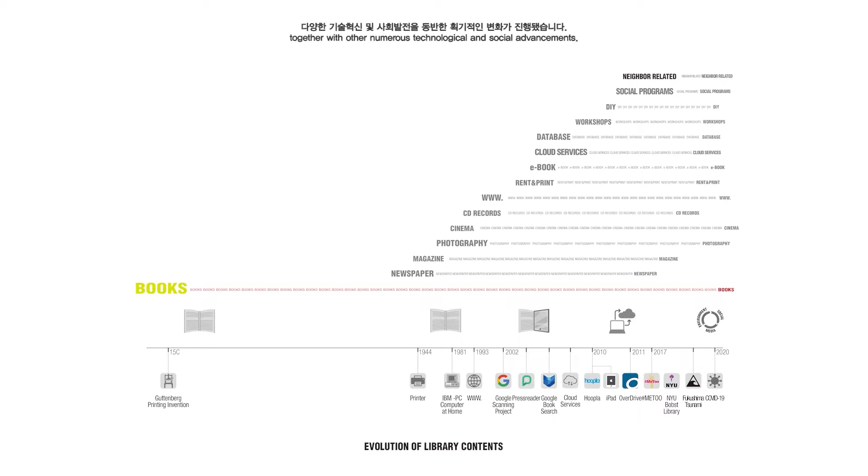For centuries, libraries have been traditionally the spaces where books are stored and read. However, since the early 2000s, a transformative change has been underway with the digitalization of cultural content, together with other numerous technological and social advancements. This has exponentially broadened the spectrum of content available within the walls of the library.

Also, the patronage of libraries has expanded both in numbers and diversity. While in the past libraries were primarily visited by scholars and elite, today they attract a multifaceted cross-section of society. People now turn to libraries not only for internet access or reading a book, but also to seek assistance in navigating an increasingly complex world.

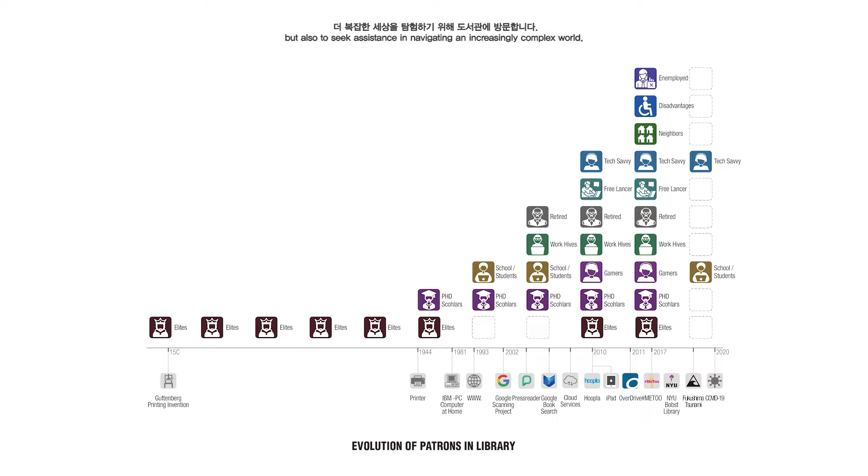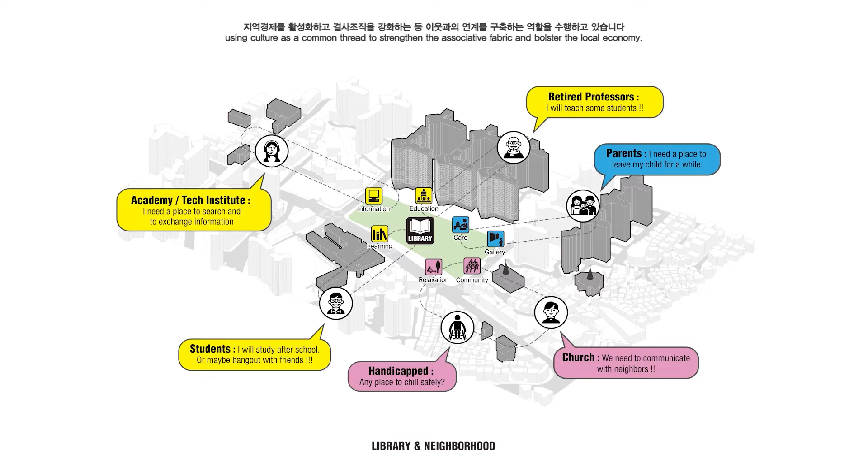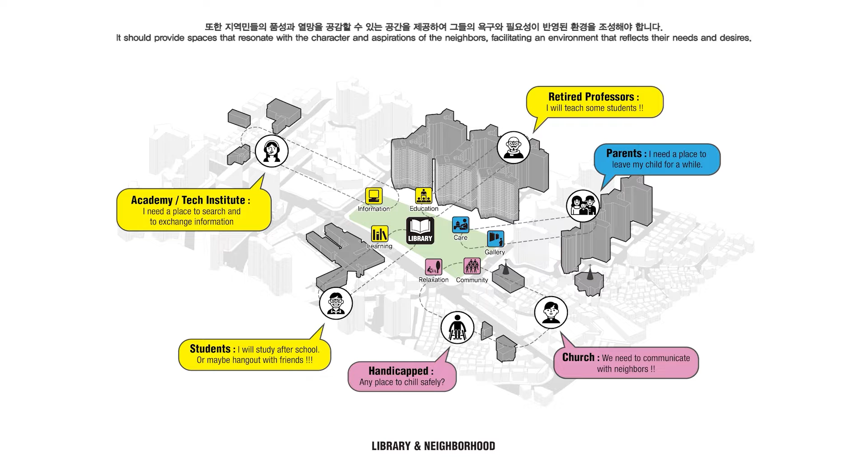The contemporary library is tasked with creating connections with the nearby neighborhood, using culture as a common thread to strengthen the associative fabric and bolster the local economy. It should provide spaces that resonate with the character and aspiration of the neighbors, facilitating an environment that reflects their needs and desires. To a certain extent, we can say that libraries have become the true centers of community.

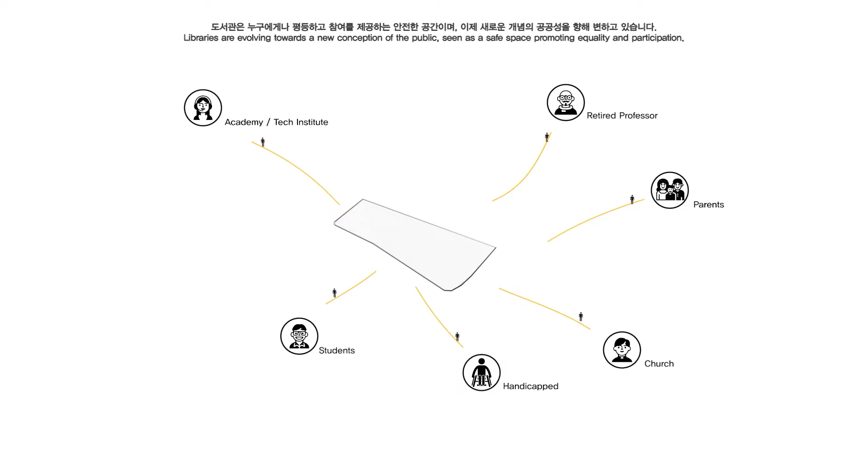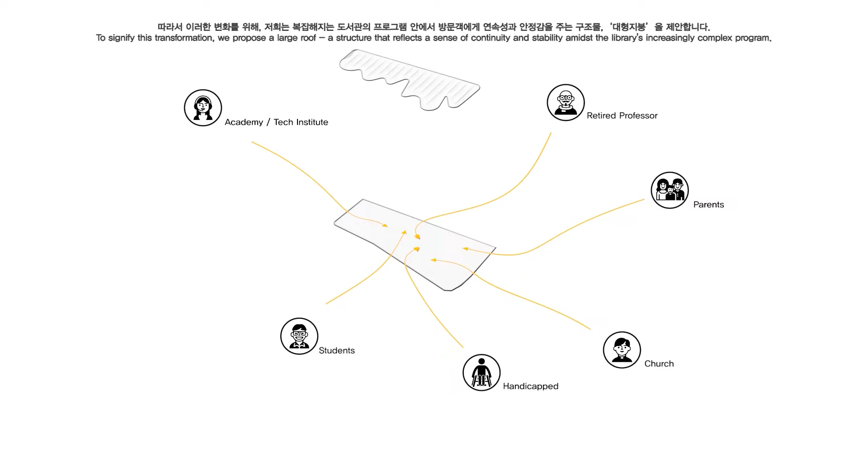Libraries are evolving towards a new conception of the public, seen as a safe space promoting equality and participation. Today, libraries are more of a public space than a building. And to signify this transformation, we propose a large roof, a structure that reflects a sense of continuity and stability amidst the library's increasingly complex program.

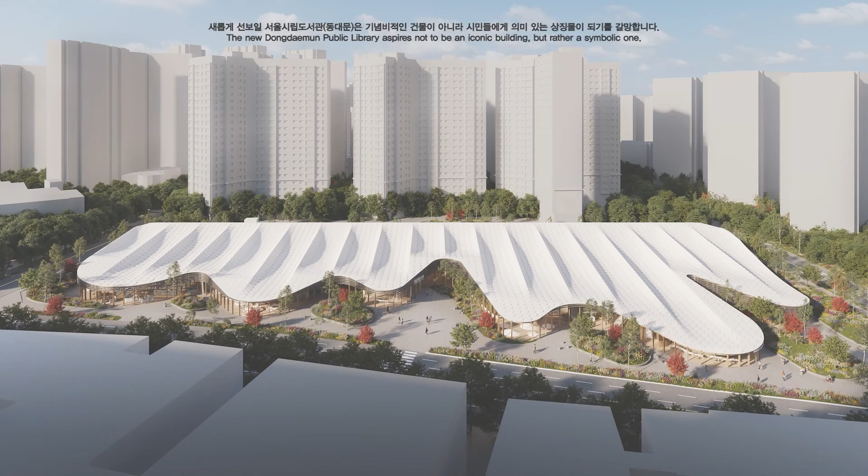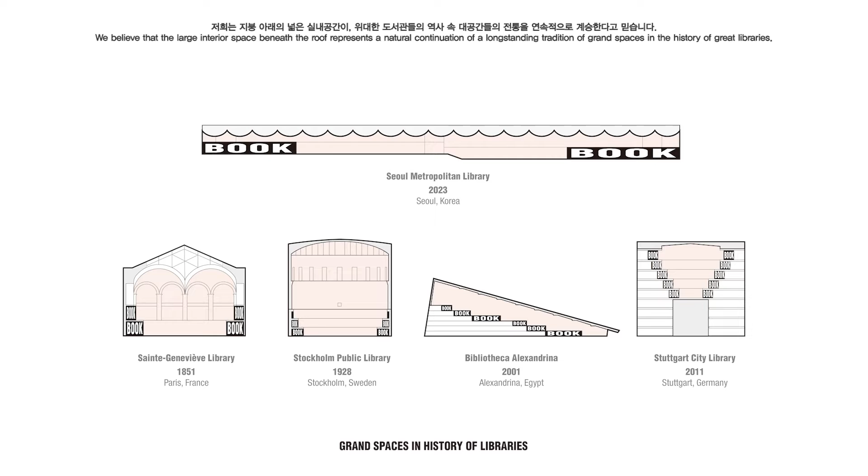The New Dongdaemun Public Library aspires not to be an iconic building, but rather a symbolic one. It seeks to move away from the notion of fortress and monumentality, instead embracing the idea of an open institution accessible to all. We believe that the large interior space beneath the roof represents a natural continuation of the long-standing tradition of grand spaces in the history of great libraries.

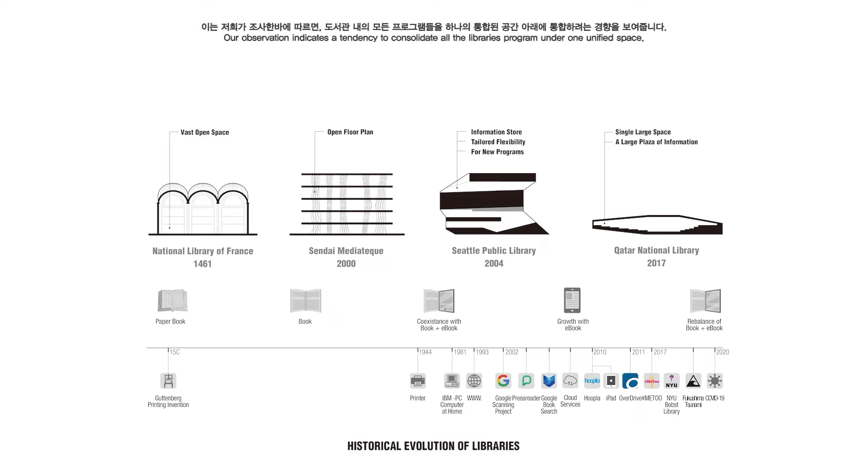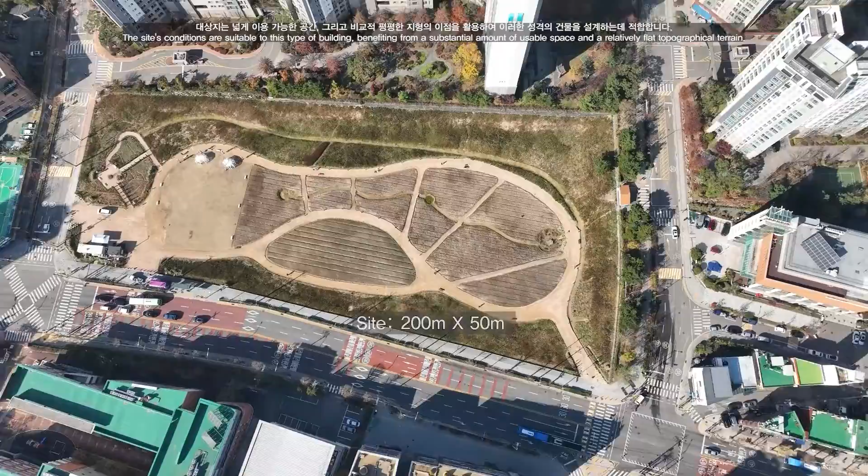Furthermore, we assert that the typology of a single roof aligns with other visionary libraries built in recent times. Our observation indicates a tendency to consolidate all the library's program under one unified space. The site's conditions are suitable to this type of building, benefiting from a substantial amount of usable space and a relatively flat topographical terrain. The initial step involves accommodating the building to the existing topography.

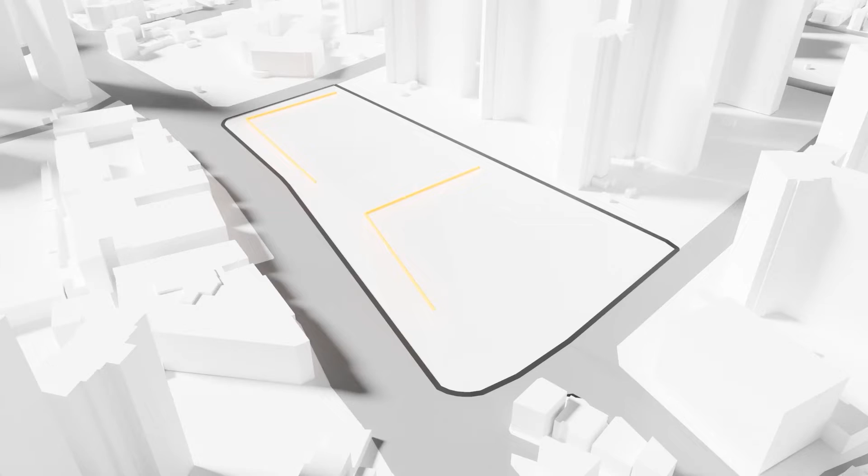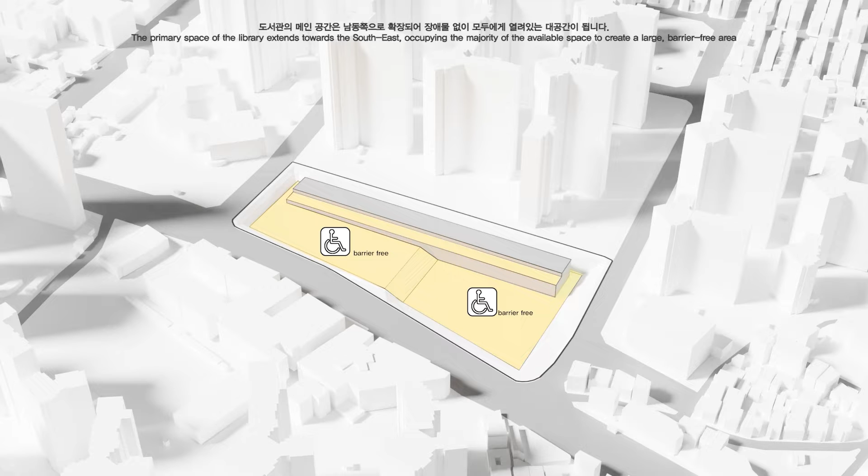Once the levels are determined, a longitudinal building is located on the northwest side of the plot. A service road behind the building provides access to storages, drop-off vehicle lines, and parking lots. The primary space of the library extends towards the southeast, occupying the majority of the available space to create a large barrier-free area. The front facade undulates, blurring the distinction between the interior and the exterior, including the natural area surrounding the building. A continuous glass facade facilitates a direct connection between nature and interior spaces.

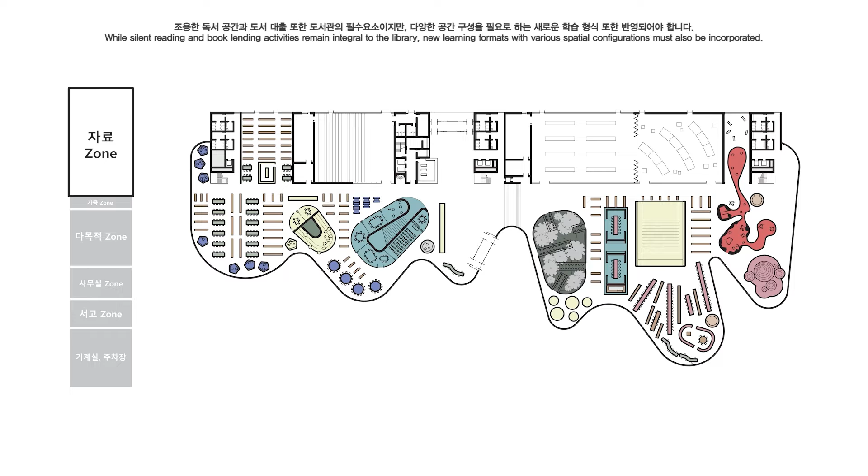The multipurpose room, archive, and exhibition spaces are located in the longitudinal piece. In contrast with the rigidity of this piece, the library, or data zone, occupies a flexible and dynamic space. As mentioned earlier, the library of the future must provide innovative ways of accessing information. While silent reading and book lending activities remain integral to the library, new learning formats with various spatial configurations must also be incorporated. What is important is to organize all those spatial variations so that they don't interfere with each other.

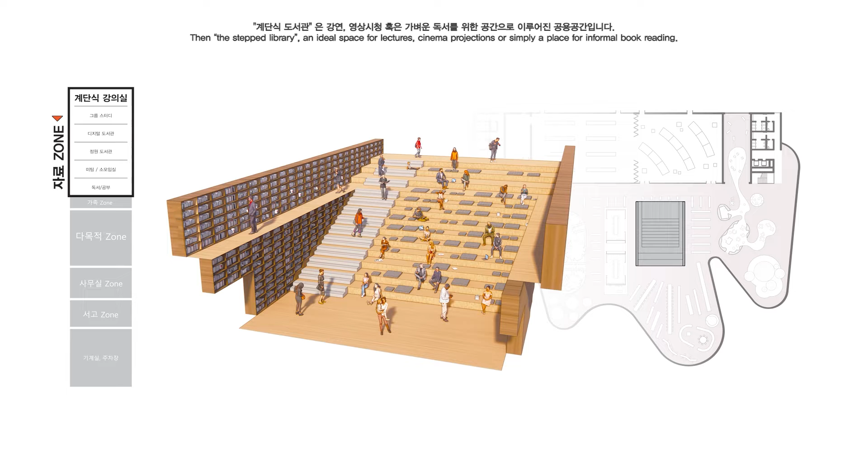From left to right, we start with the family zone, an area for the youngest, divided in various zones according to children's age. Then the stepped library, an ideal space for lectures, cinema projections, or simply a place for informal book reading. The active group studying area is organized with long tables and bookshelves in a dynamic configuration. Then the digital library, where users can find PCs, digital checkpoint, laptop rental stations, and a cafe.

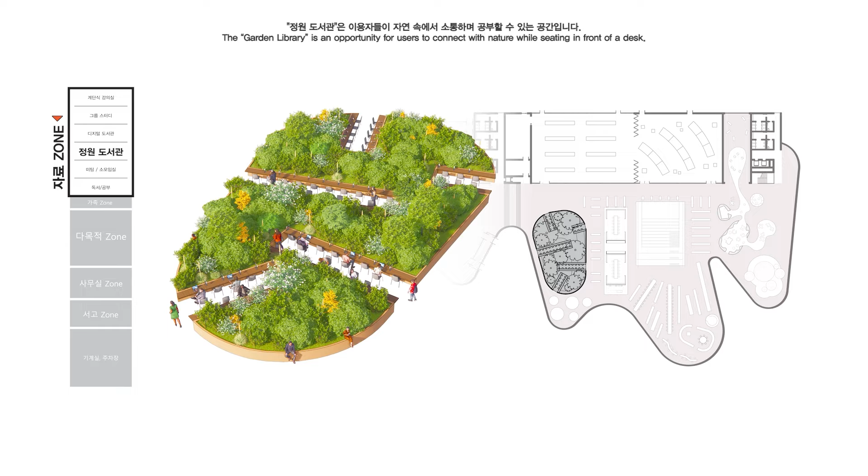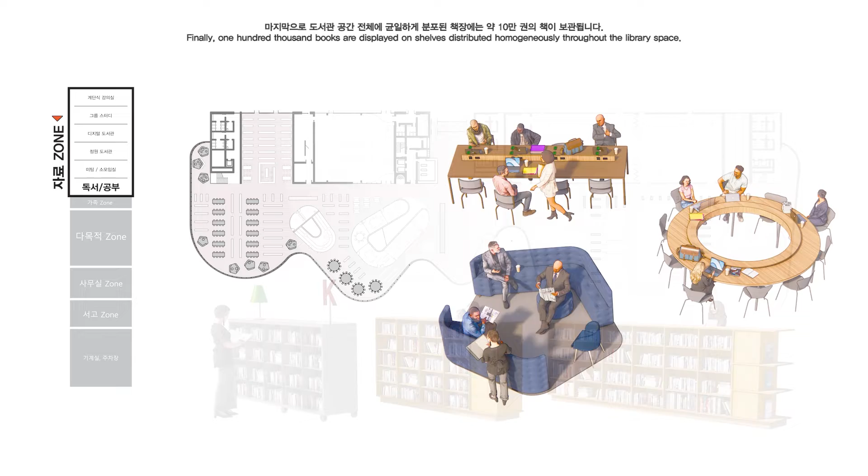The garden library is an opportunity for users to connect with nature while sitting in front of a desk. The library also provides carrels that can be used for focused study or small, medium-sized meetings. On the left side of the library space is located the silent area, a place for concentration and silent study. Finally, 100,000 books are displayed on shelves distributed homogeneously throughout the library space. Bookshelves are equipped with wheels, allowing for an easy rearrangement within the space.

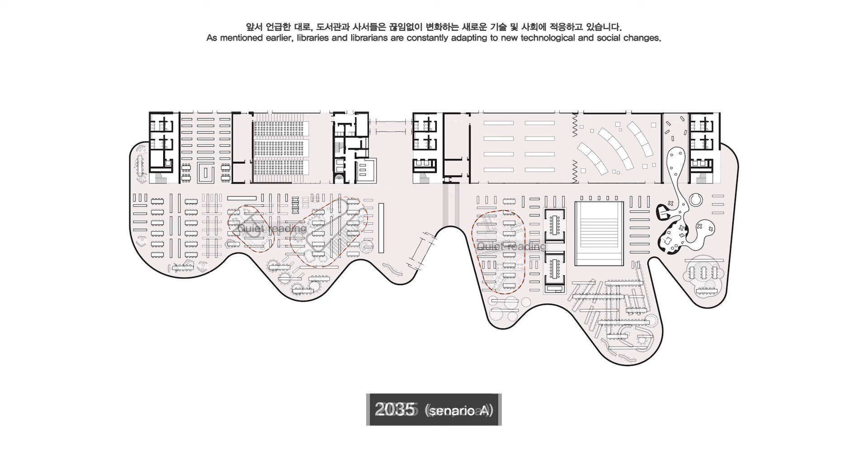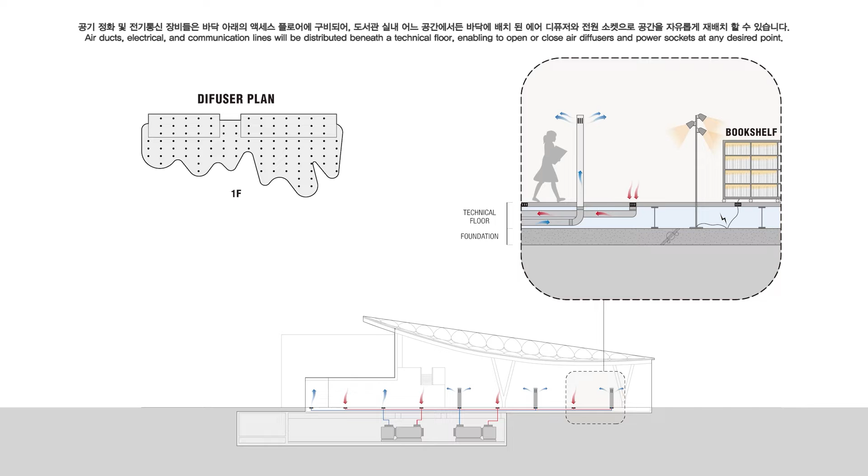As mentioned earlier, libraries and librarians are constantly adapting to new technological and social changes. Consequently, the buildings we design for libraries must facilitate continuous adaptation, providing librarians the freedom to redesign the space according to future needs. The design of the mechanical and electrical systems facilitates an easy reconfiguration of activities. Air ducts, electrical and communication lines will be distributed beneath a technical floor, enabling to open or close air diffusers and power sockets at any desired point.

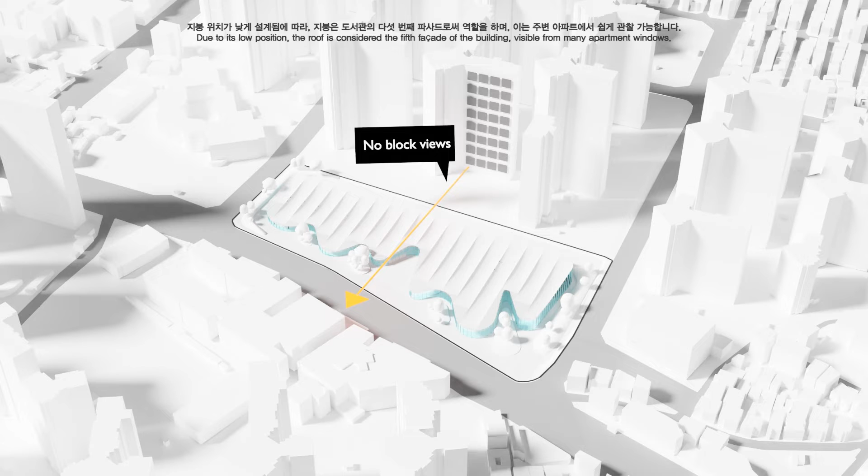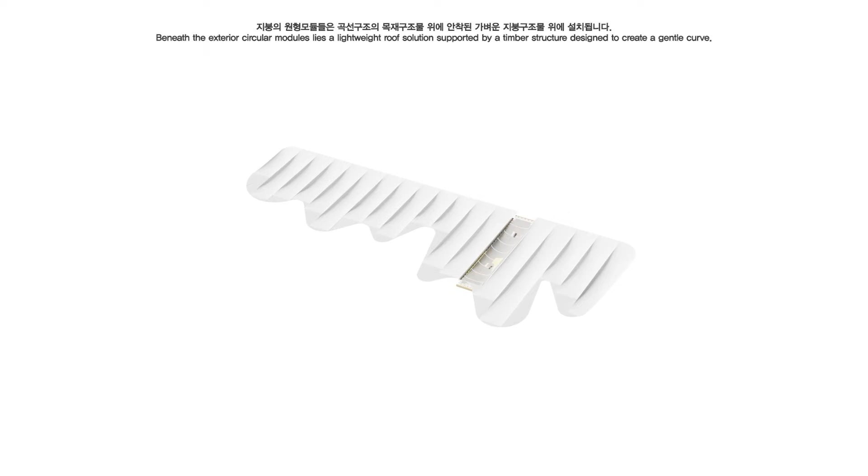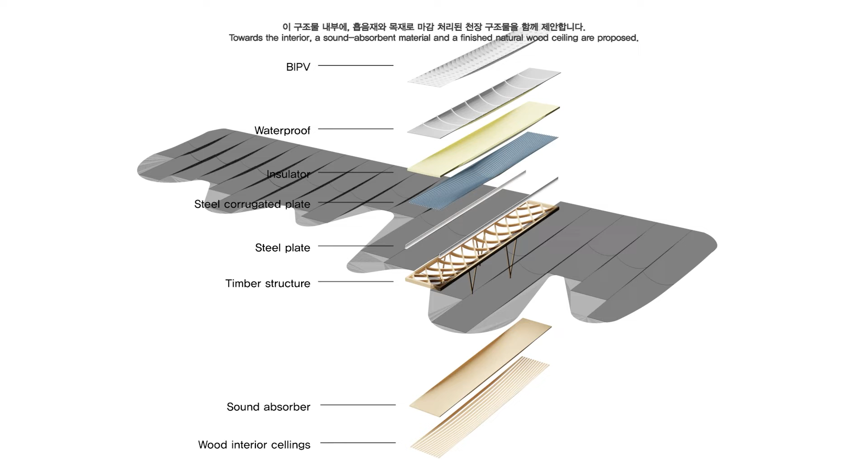A grid of columns distributed throughout the main space will provide support to the timber roof. The placement of the roof in a low position aims to prevent obstruction of views from nearby apartments. Due to its low position, the roof is considered the fifth facade of the building, visible from many apartment windows. Consequently, all technical elements of the roof will be integrated into the overall design. Beneath the exterior circular modules lies a lightweight roof solution supported by a timber structure designed to create a gentle curve. Towards the interior, a sound-absorbent material and a finished natural wood ceiling are proposed.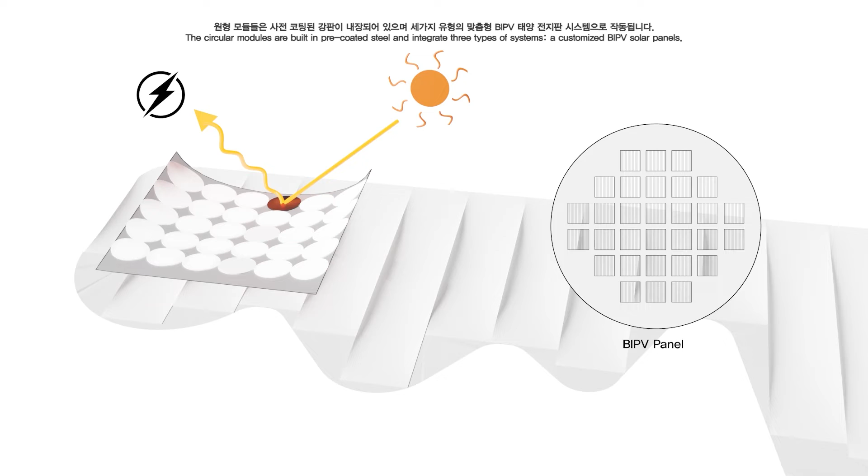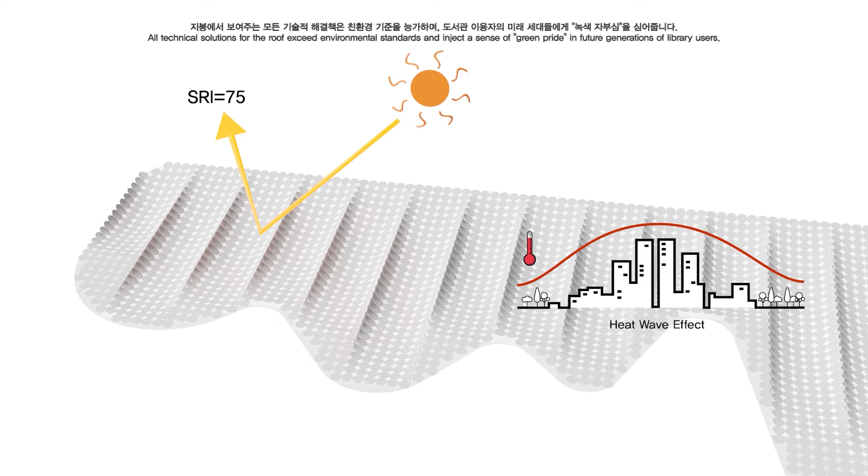The circular modules are built in pre-coated steel and integrate three types of systems: a customized BIPV solar panel, a titanium dioxide coating module capable of absorbing and destroying air pollution, and finally, a skylight allowing light and fresh air to circulate inside the building. The light color of the roof retains a small amount of heat from the sun, helping to reduce the overall temperature of the neighborhood. All technical solutions for the roof exceed environmental standards and inject a sense of green pride in future generations of library users.